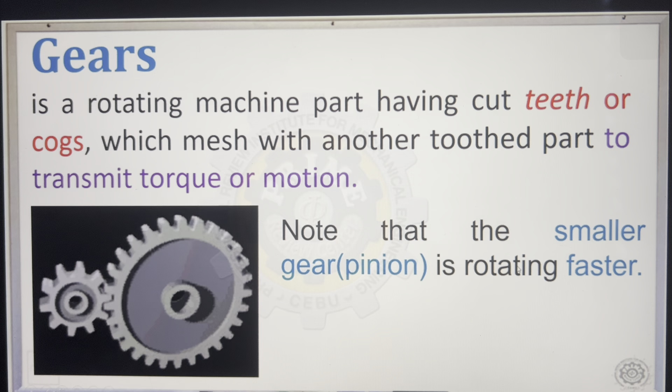We are very familiar with gears and how they look. The smaller gear is called pinion, and the bigger gear is simply called gear. If you observe their motion, every time they mesh, the pinion rotates more times compared to the gear. So by observation and logic, the smaller gear called pinion is rotating faster. Every time it gives rotational motion, if you check the value, you'll know immediately that the faster rotation is the pinion's rotational speed, and the smaller value is the rotational speed of the gear.

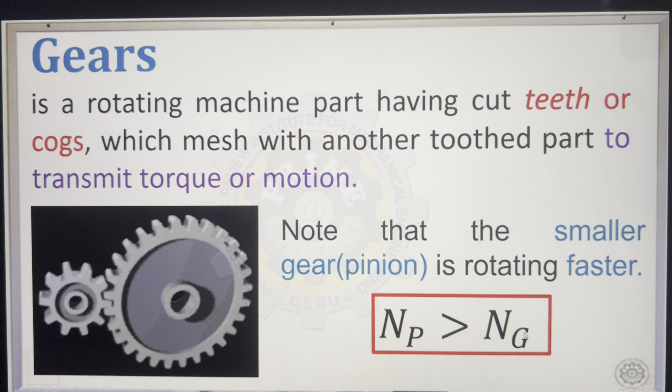Next, we have different types of gears, depending on the position of the axis of the shaft. For parallel axis, we have spur gear, helical, rack and pinion. For intersecting axis of the shaft, you use bevel gear. And for non-intersecting, worm and worm wheel or worm gear. These are the ones that appear in the board exam. Of course, there are many types of gears available, but let's focus on the possible questions: spur, helical, bevel, and worm.

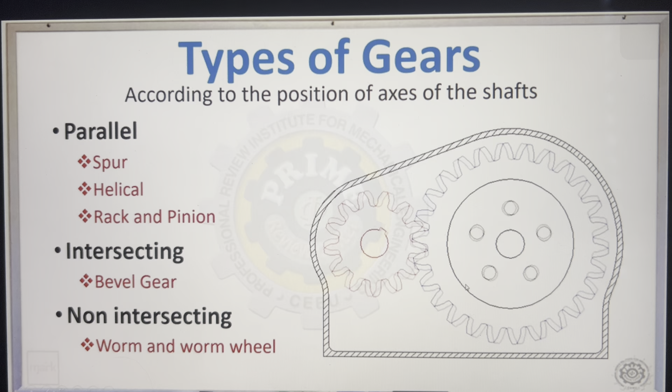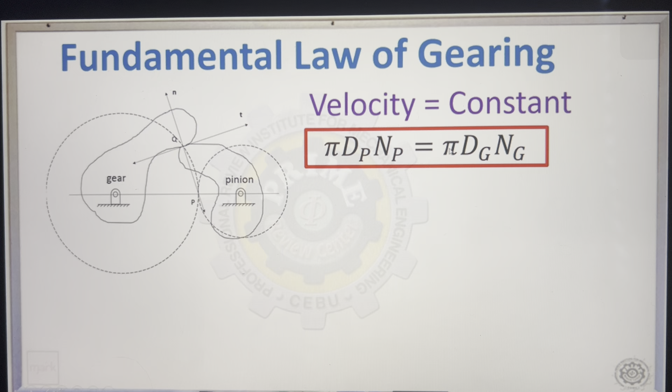Let's start with the fundamental law of gearing. If you have two gears meshing, remember that velocity should be constant. So in meshing gears, velocity is constant. The formula for velocity is pi times diameter times n. So for the velocity of the pinion, it's pi times diameter of the pinion times speed of the pinion. For the velocity of the gear, it's pi times diameter of the gear times rotational speed of the gear.

Basically we can get a ratio from this. Cancel out the pi, then we have what is called the gear ratio or speed ratio. If the gear ratio is greater than 1, that means the numerator is higher and the denominator is smaller. Just look at the logic. For example, for rotational speed, if it's greater than 1, that means fast over slow. For diameter, if given, it's big diameter over small diameter when greater than 1.

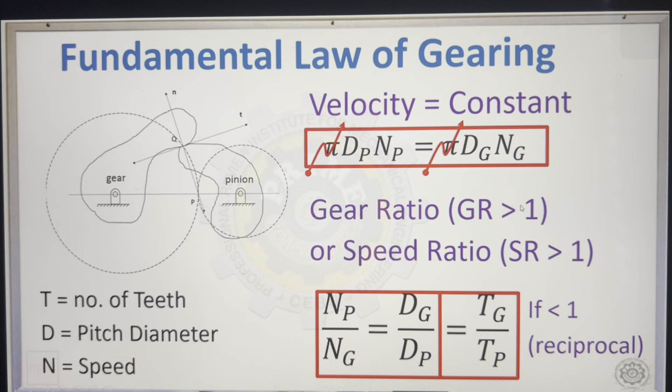Let's talk about pressure angle. Our symbol for that is phi. It is the acute angle between the line of action and a normal to the line connecting the gear centers. Gears have pressure angles - normally only two are given: 14.5 degrees pressure angle or 20 degrees pressure angle. There are other pressure angles rarely used, like 22.5 degrees and 25 degrees. So it's either 14.5 or 20, that's typical.

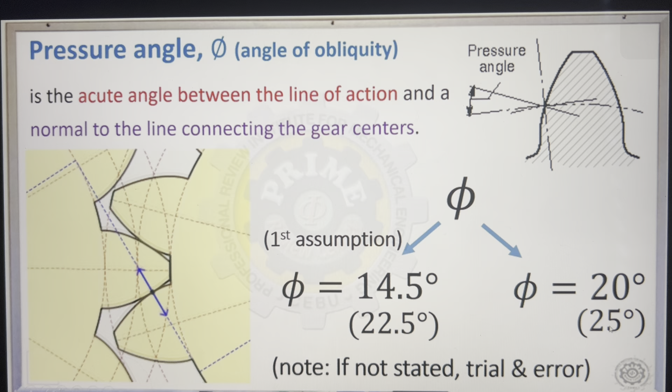Next, let's talk about basic gear terminology - these are important to understand. You have PC, PD, and module. When we say PC, that is the circular pitch, or can also be called transverse circular pitch. When we say PD, that is diametral pitch. M is for module. D is called pitch diameter, or simply diameter. Let's not get confused - diametral pitch is different from pitch diameter. So when we say diametral pitch, it's PD, and when we say pitch diameter, that is simply diameter.

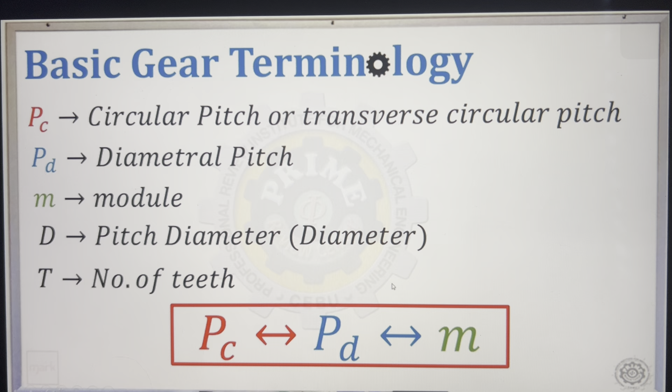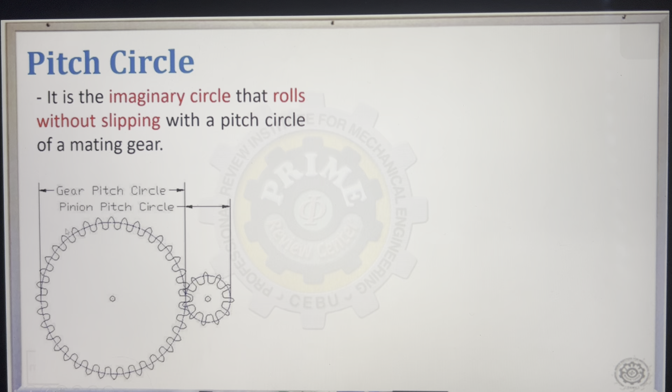Let's define these one by one. You have the pitch circle - it is the imaginary circle that rolls without slipping with the pitch circle of the mating gear. So this is our pitch circle. They only have one point of contact, the tangent point here. So this is called pitch circle. So where is the circular pitch?

So, yung circular pitch, that is the distance measured on the pitch circle between any two similar points on the adjacent teeth. So, kung magdodrawing tayo ng circular pitch, that is the distance from this point hanggang dun sa next point na similar.

So, from here hanggang dito yan. Now, this is a circular pitch, PC.

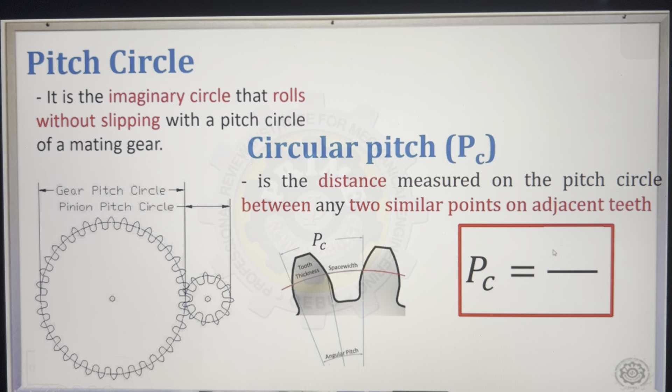Pag kinonect mo lahat ng circular pitch hanggang makaikot ka, that is called circumference. So, para makuha mo yung sukat ng PC, kunin mo muna yung isang ikot, circumference, i-divide mo ng isang ngipin kasi isang ngipin yung tinamaan dito.

So, ang formula ng PC, circumference pi D over number ng ngipin. Okay, kung ilan man yung ngipin dito sa ating gear, yun yung sukat ng PC. So, simple lang, circumference over number of teeth, pi D over T.

Now, kindly remember na para mag-mesh yung dalawang gears, yung circular pitch ng pinion, yun din dapat yung circular pitch ng ating gear. So, this is constant, hindi nagbabago.

Same lang sila. So, pwede kong gamitin dito diameter ng pinion, divide ko ng number ng teeth ng pinion. Or, parehas lang yan sa diameter ng gear, gamitin dito over number ng teeth ng gear. So, this is our formula for circular pitch.

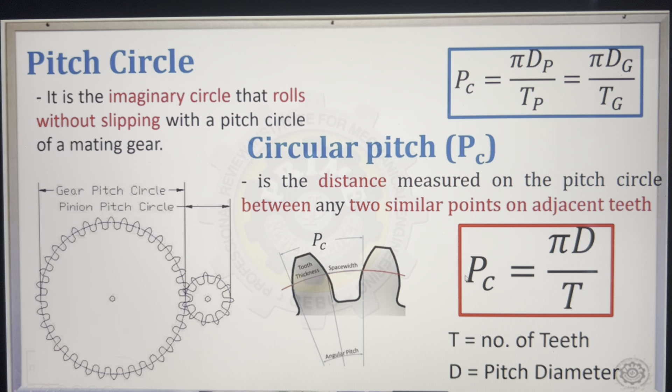Next. How about the diametral pitch? So, ang diametral pitch, hindi yan nakikita dun sa gear. It simply describes the gear tooth size.

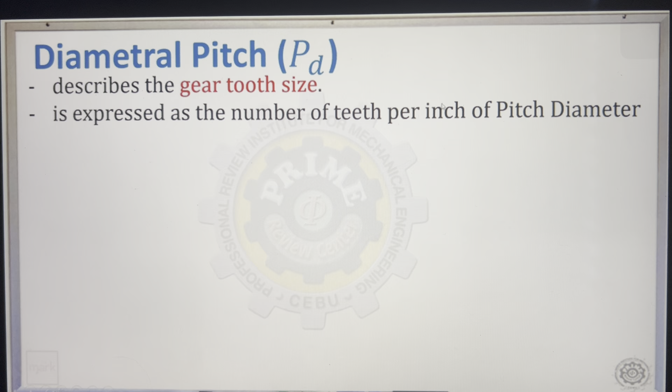Okay, ang general formula niya is this: number of teeth per inch, okay, ng ating diameter. So, number of teeth per inch, yun yung pinaka-formula. So, this is T over D.

Okay, number ng ngipin, kada diameter. Now, ang unit niya is teeth per inch. Or pag SI naman, pwede rin namang teeth per millimeter.

Pag walang sinabi regarding sa diametral pitch, ang standard na analysis dito, first assumption natin, teeth per inch, kung walang binigay na unit. Okay? So this is English.

Now, how about the module? By the way, ang diametral pitch is also constant. So, kung ano yung diametral pitch ng gear, yun din dapat yung diametral pitch ng pinion. So, T over D, pwede gamitan pinion, or kaya gear.

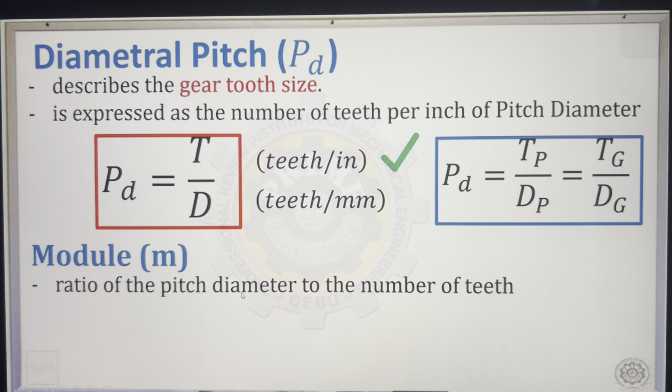Now, for the module naman, ang symbol natin is M. That is the ratio ng pitch diameter to the number of teeth. So, technically speaking, kabaliktaran ng diametral pitch.

Okay, ang module is diameter kada ngipin. So, ang unit niyan is millimeter per teeth, or kaya naman inch per teeth.

Now, pag walang binanggit regarding sa unit ng module, ang first assumption natin parati dito, SI naman. So again, remember, pag diametral pitch, English yung assumption if not stated. Kapag module naman yung binigay, SI.

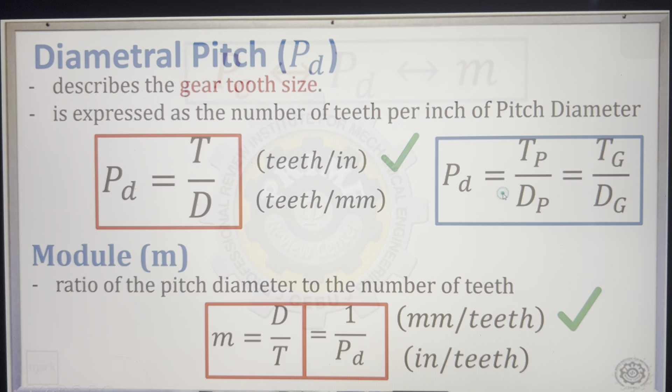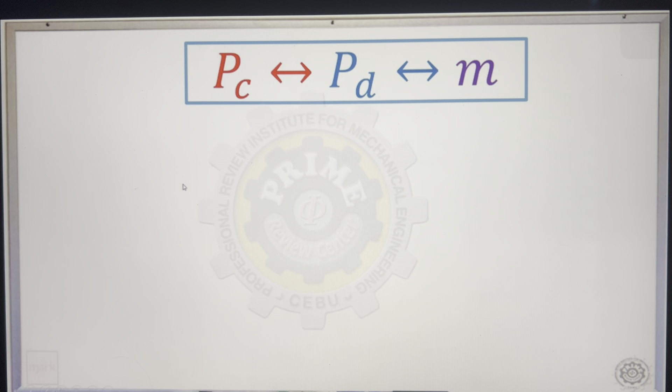Next, how about the relationship? Sabi ko sa inyo kanina na yung PC, PD, tsaka module, related sila. So, nakita natin yung formula. I-elaborate ko lang maigi: ang formula ng circular pitch is circumference kada ngipin.

Ay diametral pitch, ngipin over the diameter, and module, reciprocal nito. Now, kung titingnan nyo mabuti yung formula ng PC, pi d over t, yung d over t, ito yun. So, that is already module.

So, ang formula pala ng PC, pwede siya isulat as pi module. And then, yung module na to, pwedeng palitan ng reciprocal ng PD. So, 1 over PD is module. And then, mathematically speaking, yung PD, pwede natin i-multiply dito. So, another formula is PCPD pi.

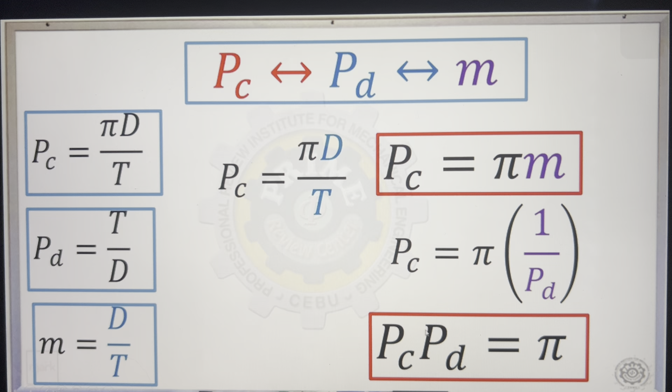So, yun yung mga tatandaan natin: PCPD pi, PC pi module. So, lagi nyo siyang isulat. Okay, madali lang siya i-derive. Okay, those formulas are napakahalaga.

Next, center distance. So, for center distance, you can use observation. So, you have external and then internal gear. Pag external gear, ganito yung ating configuration. Okay, and then for internal naman, nasa loob.

If you will notice kung paano yung rotation nila, sa external gear, this is opposite yung direction ng ikot. If the pinion is clockwise, ang ating gear counterclockwise. So, opposite. Samantala, pag internal gear naman, same yung pinaka-rotation nila.

Okay, how about the formula? So, ang formula ng center distance dito, obviously, kapag external gear, radius ng pinion plus radius ng gear. In terms of diameter, pwede mo namang sabihin yung radius, diameter over 2. So, diameter ng gear plus diameter ng pinion over 2 na lang. So, obvious yan dito sa ating drawing.

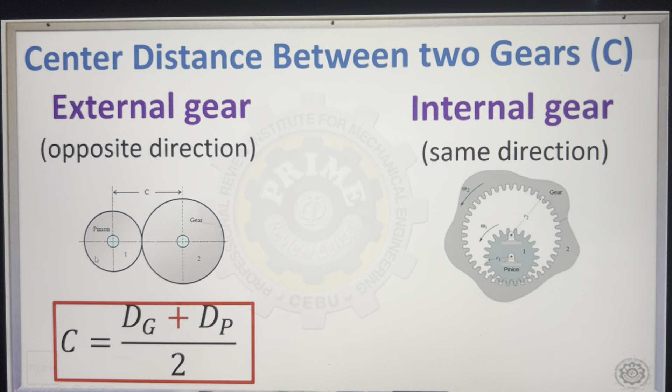Okay? Pag internal gear naman, instead na plus, gawin nyo lang minus. So, madali lang siya i-adjust. So, diameter ng gear minus diameter ng pinion over 2. Okay? Next.

Another formula is this. Kasi tama yung formula natin na to, kaya lang sometimes hindi tayo bibigyan ng diameter. So pag hindi tayo binigyan ng diameter, pwede pa rin masukat yung center distance. So adjust the formula.

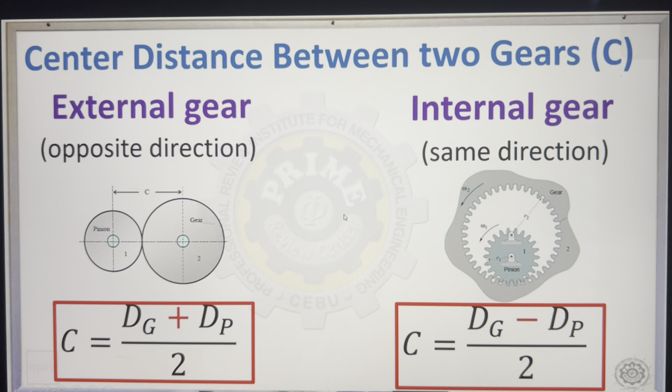So ganito yung magiging adjustment natin: so you have diameter ng pinion, diameter ng gear. This is our working formula.

I-adjust lang natin. Okay, kindly recall na yung formula ng PD is teeth over diameter. So, mathematically speaking, from here, pwede mo isulat yung diameter ng teeth kada PD. So, yung diameter ng pinion, pwede siya palitan ng teeth ng pinion over PD.

Yung diameter ng gear, pwede siya palitan ng teeth ng gear over PD. So, in-adjust ko yung formula, and then you can factor out PD.

So, finally, you can use this. So, you can memorize this formula kasi most of the time, ang ibibigay, number ng teeth, tsaka PD. So, given yung mga yan, masasolve natin yung center distance.